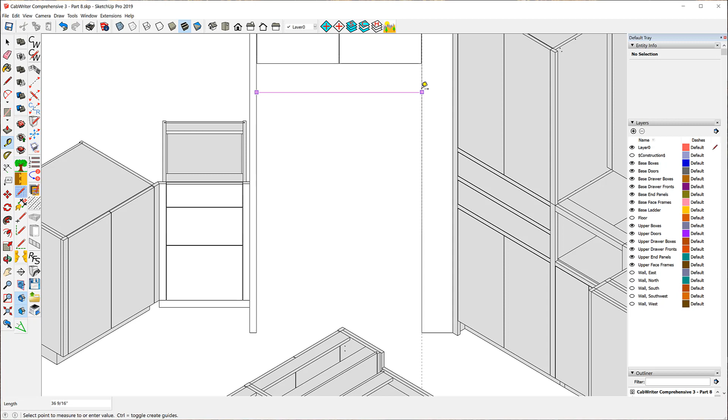One of the errors it had was the width of the opening. The width was, well, let me just check what this final correct version is. Yeah, that's 36 and 9/16. That's the correct number. What I had drawn previously was 35 and a 16th. I don't know where I got that from, but this is the kind of thing that happens when you're drawing. And so I simply redrew the cabinet.

We struggled a lot with this refrigerator cabinet, partly because it's at an angle, and partly because refrigerator cabinets are not common. We don't do a lot of them. And they have this weird starting place up here instead of where cabinets normally start. So I suppose I'll apologize for my mistakes, but I think we learn from those kinds of things.

So what we're going to do today is we're now going to work on the base. And like before, we're going to start here. We're going to work our way all the way around until we get over here. Now, there's going to be a number of changes on the base. And these two cabinets right here are the biggest culprits. This one we have to put some back panels on, if you will, back sheets.

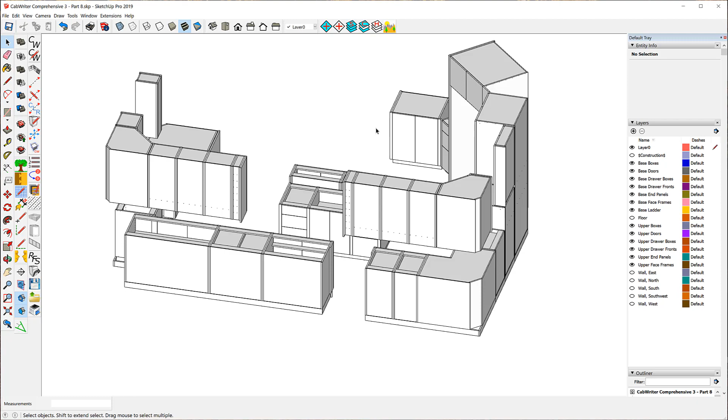And this one's more complicated. We have to cut that to an angle. So it's going to take a while. It may take more than one video. We'll see. But let's get started. This is the finished model. And I want to look at what we have to do over here.

So let me take the custom parts away and get a good look at what we have to do. We're going to put these 3 sheets on the back. And so what we're going to have to do is extend this end out so it lines up with this sheet that's going to go here. But this sheet is going to be 3/4 from the back of the cabinet.

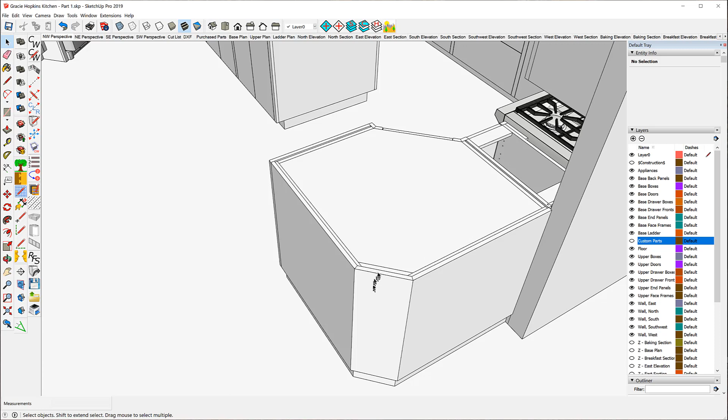Same here. This sheet is going to connect with these 2 sheets with this angle here. So we'll have to create that angle. So let's go back to our current drawing and let's see what we have to do. So here's our current drawing. The first thing I want to do is outline everything we need to do here.

I'm going to start just adding construction lines like this. And now I'm going to bring this construction line out 3/4 of an inch. And I'll bring this one out 3/4 of an inch. And I'll bring this one out also 3/4 of an inch.

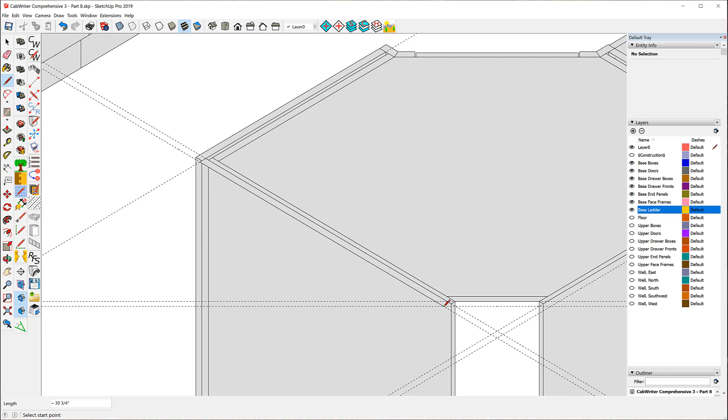And let me add one more here. 0 offset. Now I think I can draw what it is I need. Start there, go there, there, there, and back. Now use the push-pull.

Okay, now let's just make sure we know what this cabinet number is. And it's C4L. Now I'm going to make a CabWriter component of this. Make it C4L. It's going to be part of the sheet panel. End sheet, but I'm going to call it back sheet. I'll give it the same instance name. I'll CabWriter protect it and say OK.

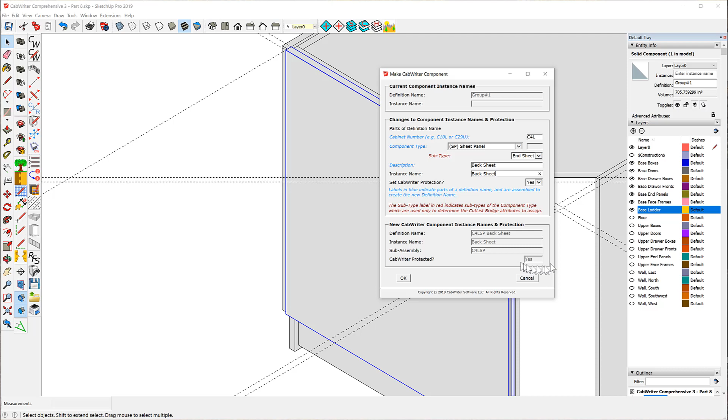Down here is the result of all of that. C4L SP for sheet panel, back sheet. Instance name back sheet. It belongs to subassembly C4L SP and is CabWriter protected. All right. Next thing I want to do is I want to clip this. I want to clip it right there. So I'll unlock it, edit it.

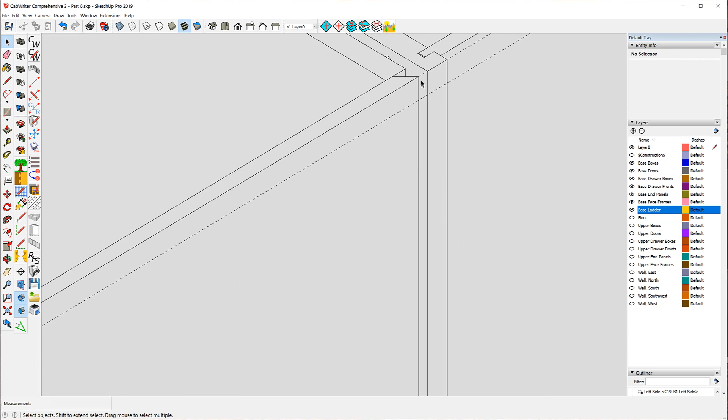Now there's two of them. This and this are the same part. So it's asking me, do I want to unlock both? And I do. So now I'll edit both at the same time. I'll go from here to here. And I'll bring it down to there. Now, this one doesn't appear to be edited, but if I look at the other end, it is. So I have to flip it.

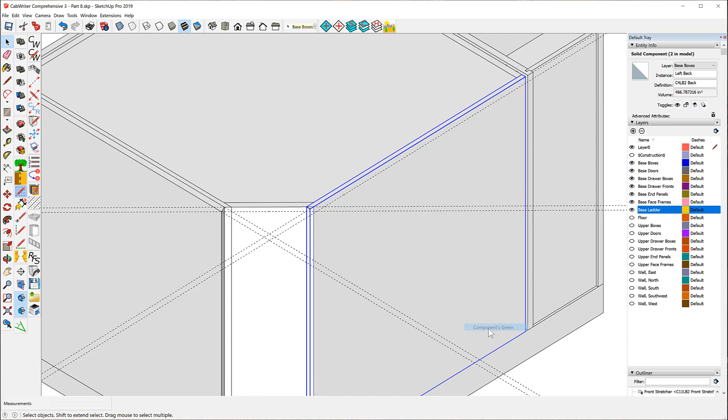And let's try flipping it along the red axis first, see what happens. Well, I got my angle down here that I wanted, but it's not quite right. So let me flip it along green. And that's better. So it's a case where you have to flip along 2 axes.

Sometimes flipping doesn't work and you have to use rotating and things like that. And sometimes a combination of flipping and rotating. But this worked by flipping it both in the red and green axis. Now I can draw this guy. And I'll bring him down with the push-pull tool. Bring him down to here. Make that a component. Again, C4L.

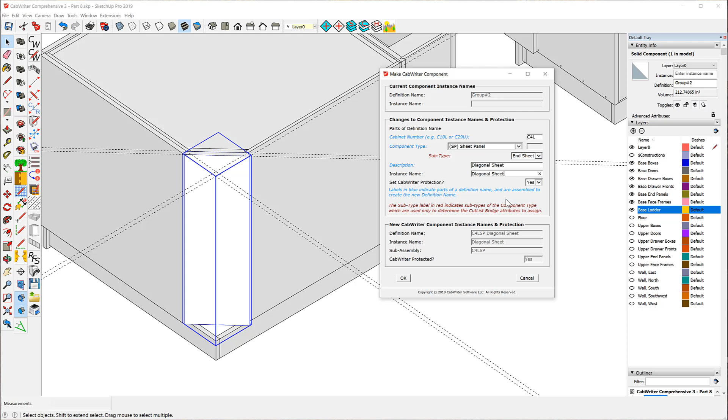And again, it's a sheet panel. End panel. I'm going to call this, I'll call it diagonal sheet. And I'll use the same name for the instance name, CabWriter protected, and say OK.

Now notice that the bounding box is not right. I have to fix that. So I'll right click, change axis, and I'll just go like that. All right, one more piece to draw over here.

Well, I'm going to have to bring the wall in on this one. I have to bring in the east wall. And I think what I'm going to do is go right to that point, out to that point, and back. And I think I've got it.

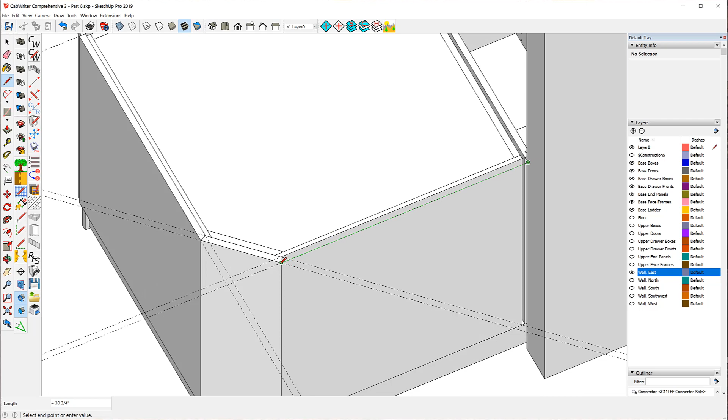And again, I'm going to call this wall sheet. I'll make it a CabWriter component. C4L. It's a sheet panel. End sheet. I'm going to call it wall sheet. Give it the same instance name. And it's CabWriter protected. And I'll say OK.

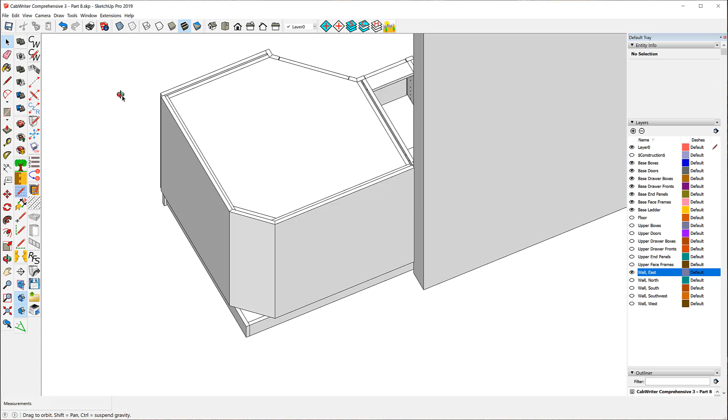All right, now I'm going to get rid of these guides. I don't need them. I have one more thing I have to do up here. I got to bring this out to the end. So I'll just pull it out to there. There we go. We have our backs added.

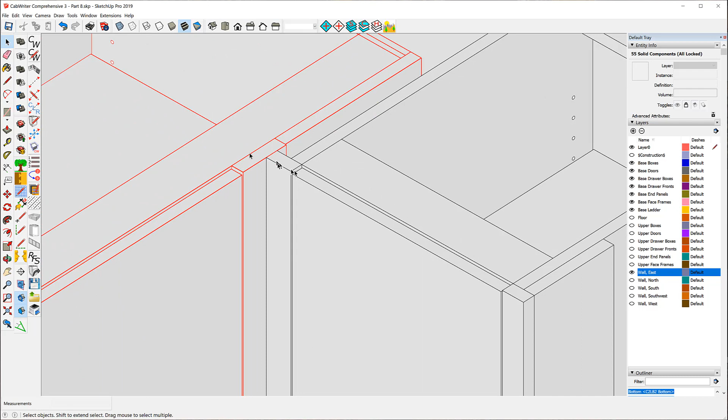So let's go around now and see what else we have to pick up. And just to be sure of what we want, I'm going to use the Select Cabinet tool to let me highlight things. Nothing there. This is fine. This belongs to this cabinet, and this belongs to this cabinet. That's fine. That's an opening. Let's choose this one. Okay, that's fine. Here we have an issue.

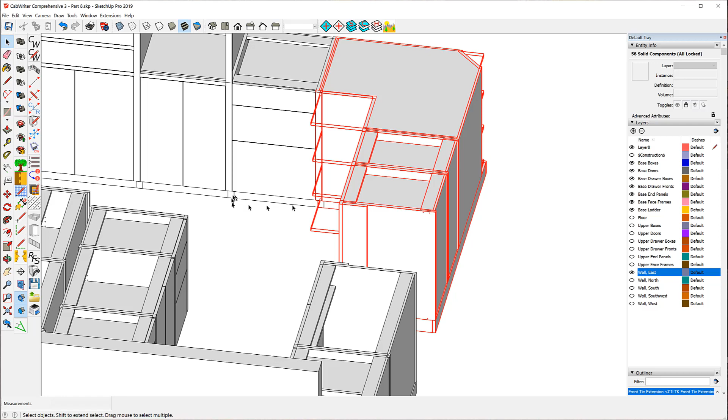And I'm going to give you a tip. You can easily spot, most of the time, stiles that are being shared by looking at the toe kick. And when you see that kind of pattern, and over here too, that's an indication that you're sharing stiles. So what I want to do is choose one of these, and I really don't care which one. Just delete it, because I still have one left.

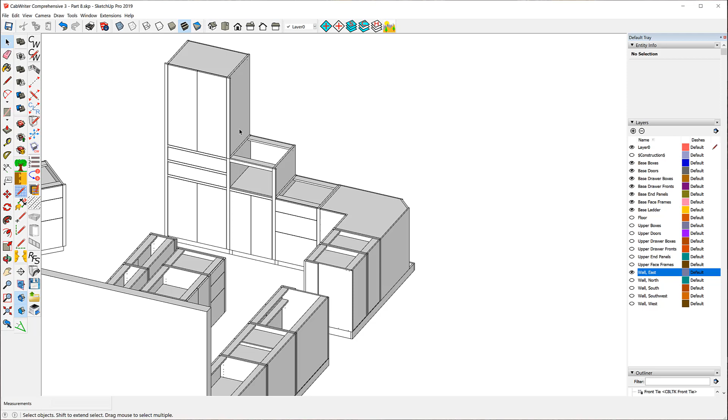Now in this case, I have to choose the upper stile. So I'll reselect and choose that one, unlock it, delete it. I've got an issue here. I'm missing a sheet here. I'll fix that in a moment. Again, here I have to keep this stile, and this one I want to unlock and delete it.

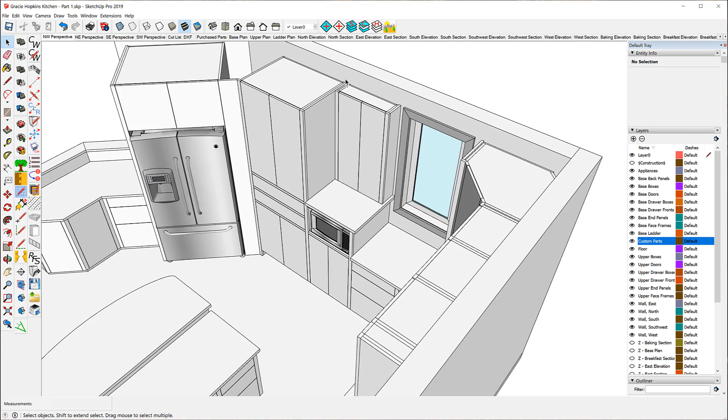All right, let's go and look at what we have to do here to fix this. If we look in the original drawing, the problem that I noticed a moment ago is that there's no end sheet here. This end sheet right here, the other drawing did not have an end sheet. And I suspect that this cabinet, instead of being up against an end sheet, is actually up against this side instead of the end sheet.

So I think we're going to have to create an end sheet here, and I think the way we do that is we have to change this stile from what it is now, which is a connector stile, to a right end sheet. Move this cabinet to the right. And the other problem I saw is we have to create an end sheet here, going back all the way up against the wall. So we'll go back and make those changes.

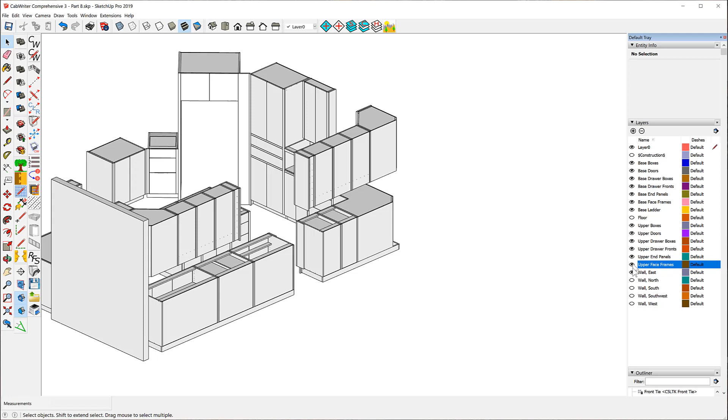Now to test out my theory, I just want to bring in the upper boxes. And as I thought, this cabinet is up against this side, and there should be a sheet here. So we're going to move this cabinet to the right. And I'm going to move it 3/4 of an inch. So an easy way to do that is use the move tool.

It says it starts here, and goes here. Well, 3/4 of an inch is half of this stile. So if I go to the center, the midpoint here on this stile, click, then I can go out here any place, the midpoint of this one perhaps, and I've just moved my cabinet to the right 3/4 of an inch.

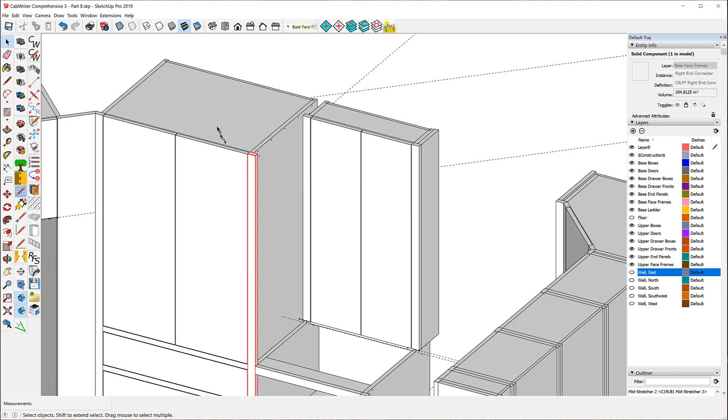Now notice this stile, look up here in the entity info, is a right end connector. I want it to be a right end sheet. So I can redraw this cabinet. Actually, I don't want to redraw it. I want to edit the story stick. The left connector I'm going to leave alone. The next one, instead of a right connector, I want it to be a right sheet. So I'll say OK. Be patient.

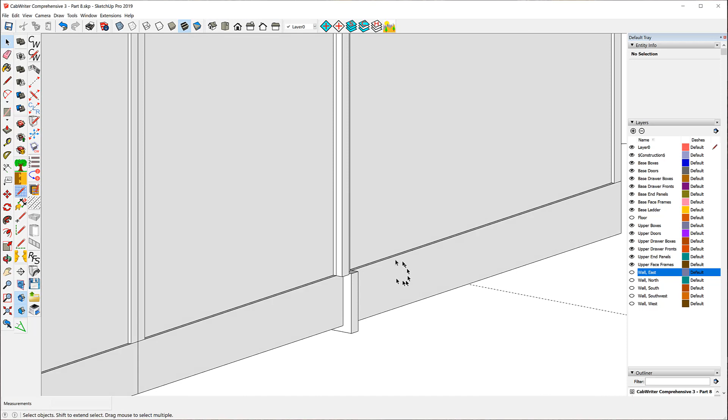Really patient. And now I have the right sheet. Now the only problem with that right sheet is it goes down over top of the side of this cabinet. So I need to edit that. Make sure I get the right one. That's a right end sheet right there.

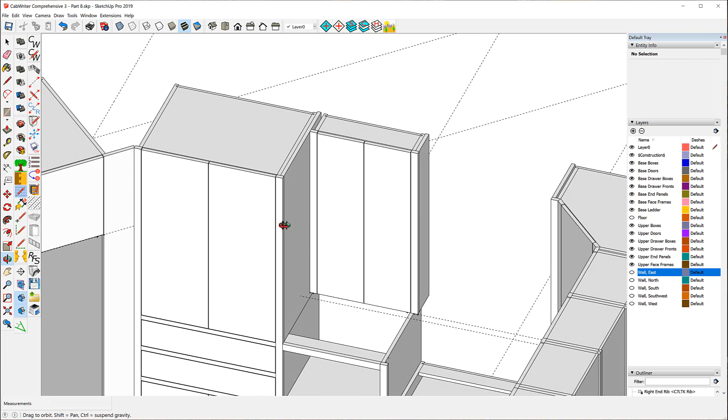So I want to unlock it, edit it, and with the push-pull tool, I'm going to bring it up. And the question is, where do I want to bring it up to? I want to bring it right to there. So that should be correct now. And we now have this cabinet up against a sheet. All right.

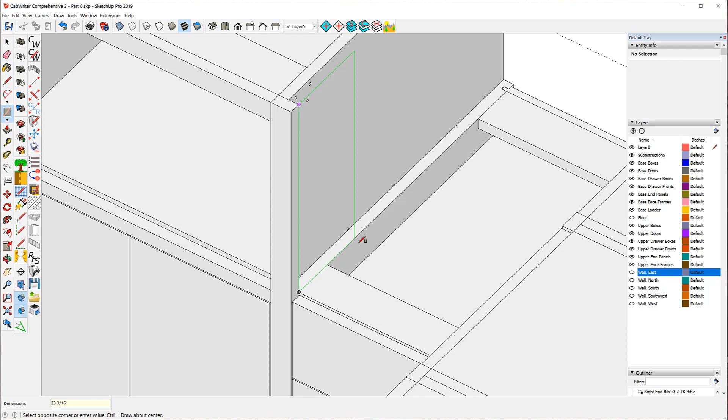Now I need to put an end sheet on this. I think the easiest way to do that is to just, I'll use the rotate rectangle tool. Come along that. And I think this wants to be 23 3/16. I think that will, yep. And I want to push-pull it to there. So that'll be 3/4 of an inch. So let's go around front.

And we're going to make it a component and add it to this cabinet, which is C7L. Oh, that reminds me. I've got to change this one back to C8L. And this one, we're going to make that a component. C7L. And it's a sheet panel, an end sheet, and I'm going to call it right end sheet.

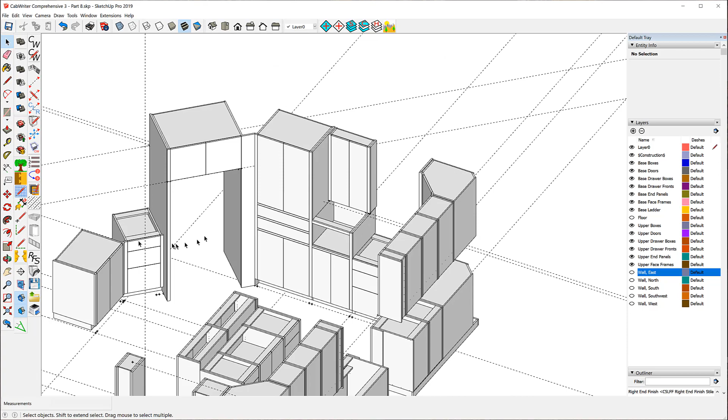Check to make sure that that says yes, so we've got it protected. And by the way, since we modified this, we should protect it too. So I'll right click and say, CabWriter, set protection. All right, now the only thing we have left, I believe, we did this in a previous part. So I think what we have to do now is put the 45-degree angle on this two-door standard base.

So let's just look at the completed drawing and see what we have to do. Let's take the custom parts layer out of here so we can see what we have to do over here. The most important dimension here, I think, is this one right here. That's 12 inches. It's 12 inches to the point where the end of the cabinet turns at a 45-degree angle to here. And you notice that there's a stile here.

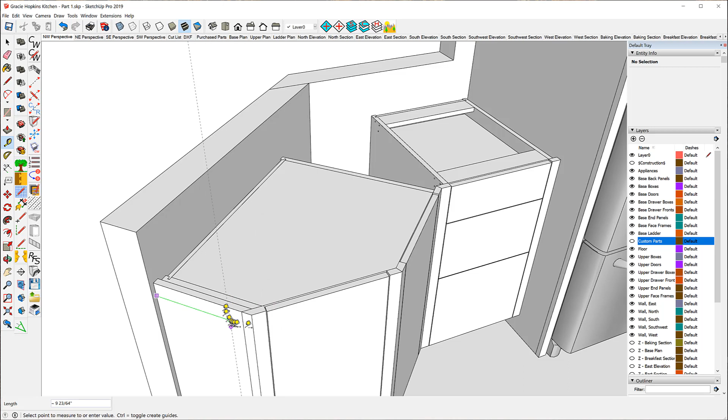And one of the things I need to do is make sure that at this point, this 45-degree line to here will represent the front of this face frame, albeit only stiles. And those will be 13/16 wide. This is 3/4 of an inch wide. I don't know why I'm getting the approximate sign there. There it is. 3/4 of an inch wide, and this is 13/16. So let me outline that.

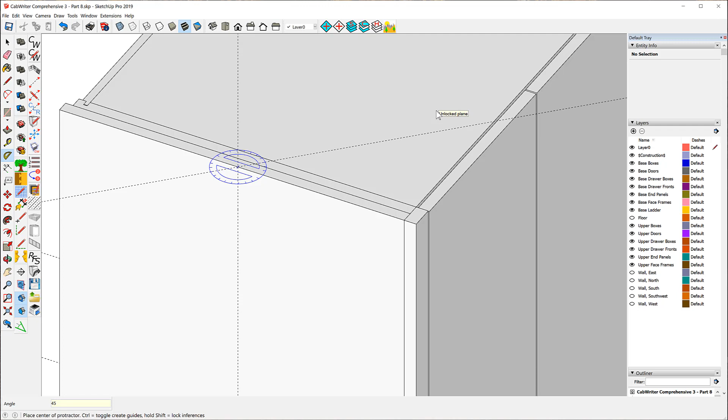Also, these are 1.5 inches. The face of these are 1.5 inches. Here, here, and here. Those all three are 1.5 inches on the face. So with that information, let's go back and see what we can do. All right, so let's mark off 12 inches. And from that, let's mark off 45 degrees. Now that's going to be the front of the face frame.

So the other thing, the face frame is 13/16 inch thick, so I'll mark that off. And right here along this line is where I'm going to cut the top and bottom at a 45-degree angle. So let me do that right away. And I want to view, well, before I do that, let me mark this. All right, now I'll look at it.

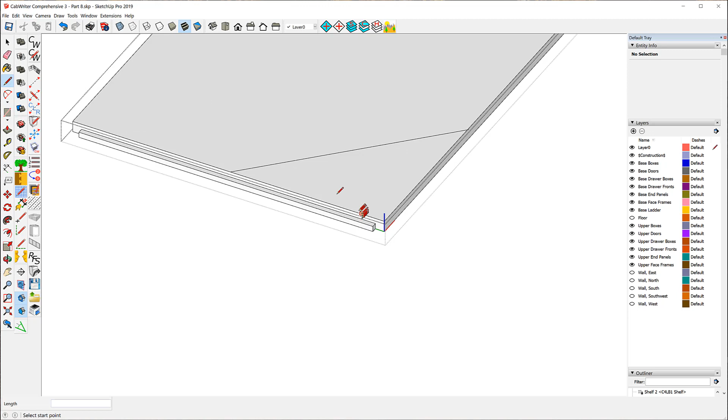I'll hide rest of model. And now I have to be very careful here. I'll mark this to get rid of this tongue. And now I can get rid of the rest of that. And I can erase this. Now I'm going to have to come back later and take a little off this, but I won't worry about that right at the moment. Oh, let me get rid of the construction line.

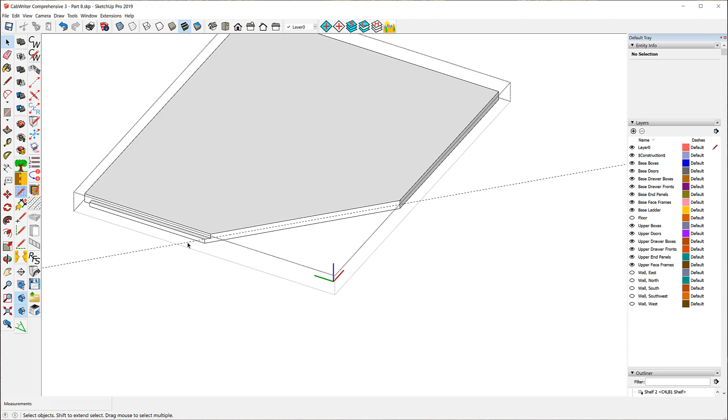Okay, now I have to do the same thing to the bottom. So let's just clear all the layers, and let's just bring back the base boxes. So now I can get at the bottom. And I'm going to bring this same line down along the blue. I'll lock in the blue with the up arrow to this bottom surface. And let me edit that. I'm going to put a mark right there. Hopefully I'll be able to see that.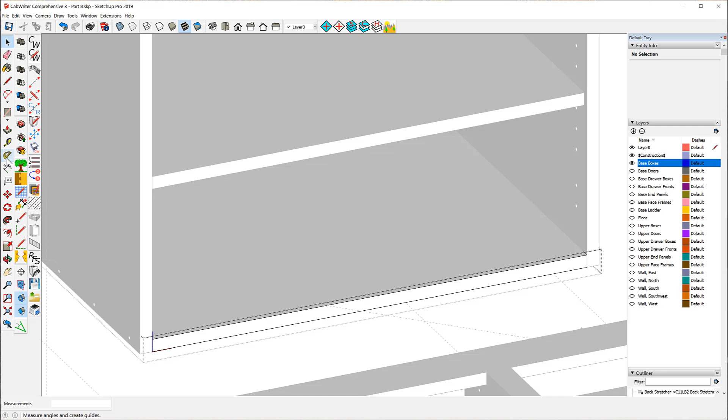Let me unlock it, edit it, and bring in the rest of the model just for the moment. Oh, come on. And what I want is put a 45-degree line right there. All right, now I can hide the rest of the model.

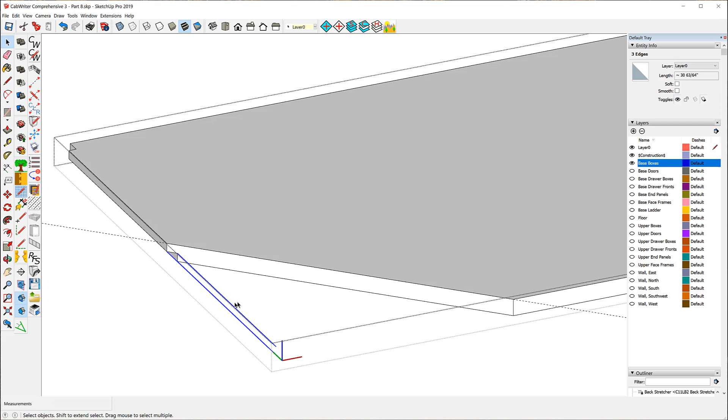And I think I have it. Okay. Let me get rid of the... Whenever you have these construction lines within an edit component mode, you got to get rid of them before you leave edit component mode. It's something I often forget to do, but it's really helpful to do it. And I can get rid of this one now. And I can get rid of this construction point.

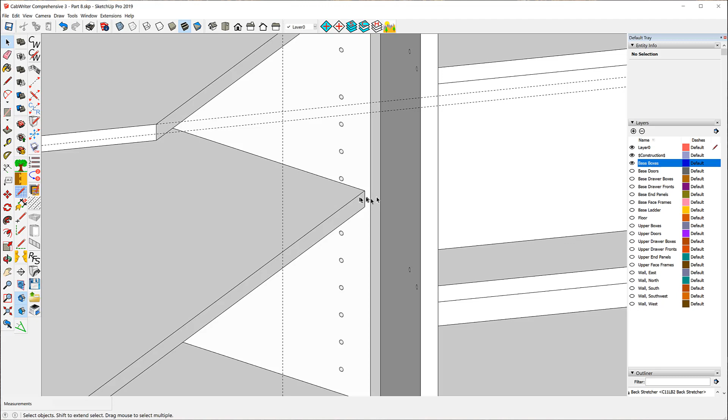Okay. Now, I can do the same thing to the shelves, but the difference is that if I bring this line down to the shelves, since the shelves are set back, and they're set back 1/4 of an inch from the sides, and the way that's done is, by the way, the clearance. When you specify a clearance for a shelf, we typically specify 1/8 of an inch. However, because the shelf has to be up against the back, it ends up being set in here 1/4 of an inch. So we need to do that. We need to bring this line down, but then we need to move it back 1/4 of an inch. So let's do that.

Bring it down along the blue to there. And we need to bring it back 1/4 of an inch. So I want to make sure I'm on this surface, so I'll hold this along that edge and I'll type 1/4 of an inch. And now I can get rid of the one in front. Edit this. And I want to unlock both shelves so I can edit both of them at the same time. And I'll view rest of model so I can see that line I put there.

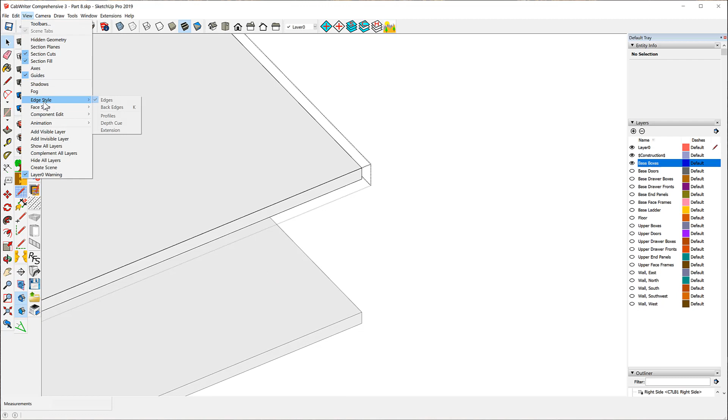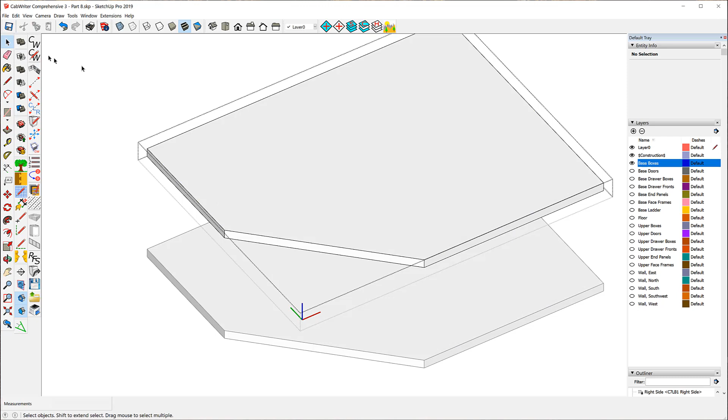And now I can hide rest of model. Oh, wait. No, I can't. So what I'll do, I'll go from here out to on that line. Now I'll have a line sticking out here, but that's okay. Now I can hide the rest of the model. And hopefully that's an end point right there. Now I can erase that. And I think I have that done. So I can erase now. Oh, I may need this up here, but I can get rid of this one.

All right, now the toughest thing we're going to have to do here is we need to move these holes, keep them intact and not lose anything. We need to move it back here. So what I want to do is I want to edit this. And view rest of model. And I'm going to put two construction points, one there and one there, to let me know where I have to come back. And what I'm going to try and do is take this part of this front and move it back to this point right there. So I'm going to hide rest of model right now.

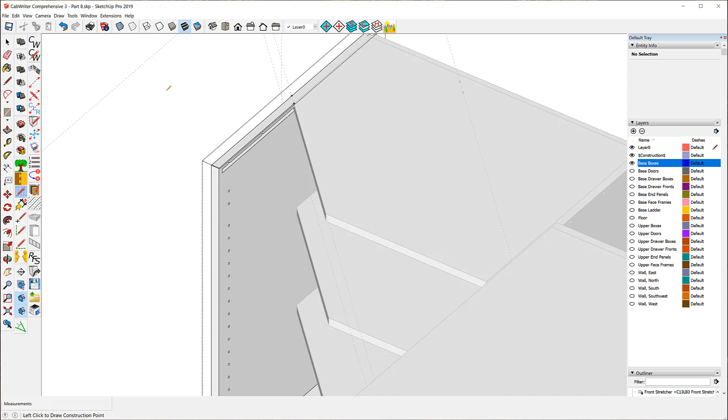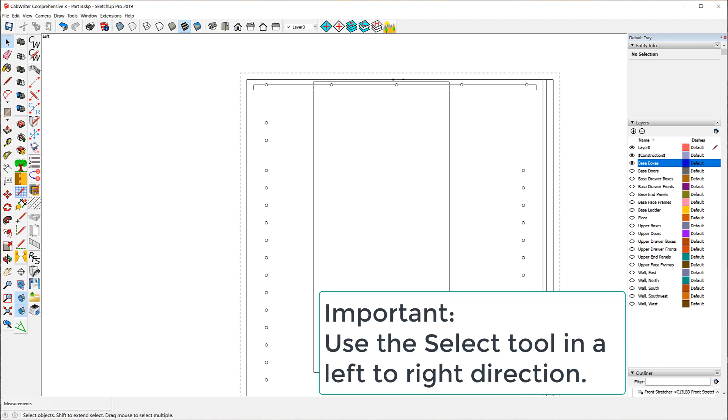This is going to be the trickiest part of this whole thing. You want to pay close attention to what I'm about to do here. Let's see if I can look at this... wrong side. That's better. Let's see what happens if I use the select tool in a left to right way. Let's see what I've selected here. Okay, let me delete that. Notice I used it in a left to right fashion to get these two holes. I'm going to delete those.

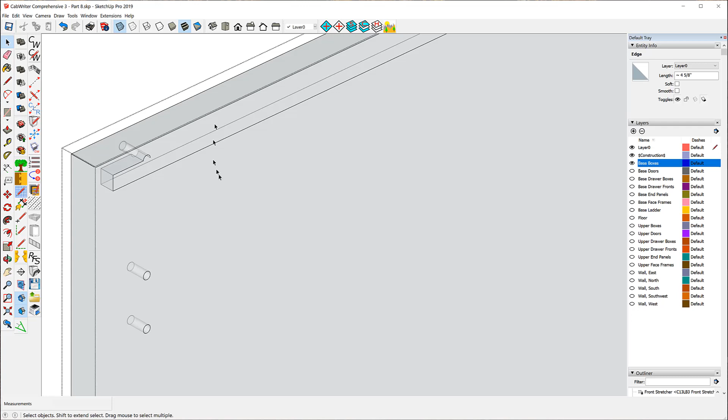Now what I want to make sure of is that I didn't delete the front or back surface. So far, so good. Now this is really tricky, and what you're going to find is that undo is your friend. If you should lose a surface, you definitely want to do an undo. The other thing I'm going to delete, and I'm going to look at this with X-ray, is I'll delete that line, that line, that line, and that line. Now I'm going to do the same thing to the bottom.

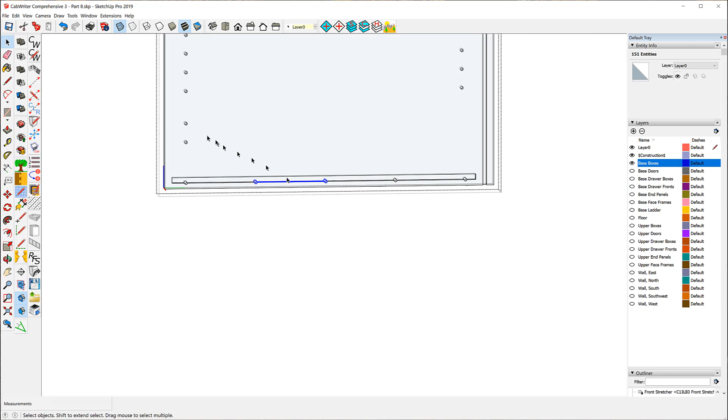So let me do the same thing to the bottom. Oops, wrong side. So I'm going to go left to right. Delete those. Now let me look, see if I selected what I thought I'm selecting. And it looks like I did. I'm going to delete that. And like I did before, I'll delete this line.

This line. This line. And this line. And again, I want to make sure that I've not lost either this surface or this one out here. So far, so good. Now it's repair time. No, now it's move time.

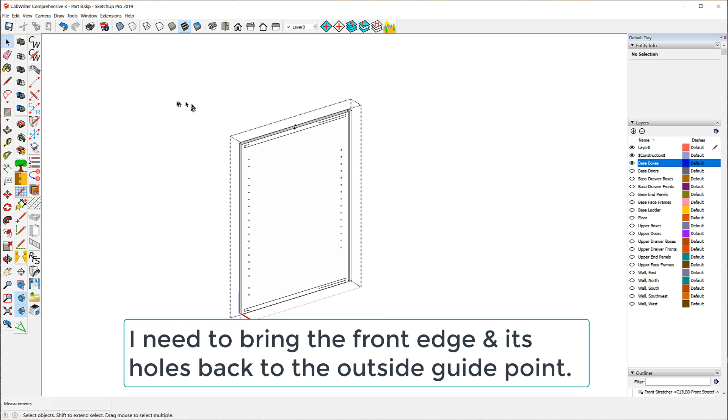So again, I'm going to choose left to right. And I'm going to do it so that I get all of this information here and the end. I don't know if I got this. I did. Okay. And I'm going to move it with the move tool. I'm going to move it to that point right there.

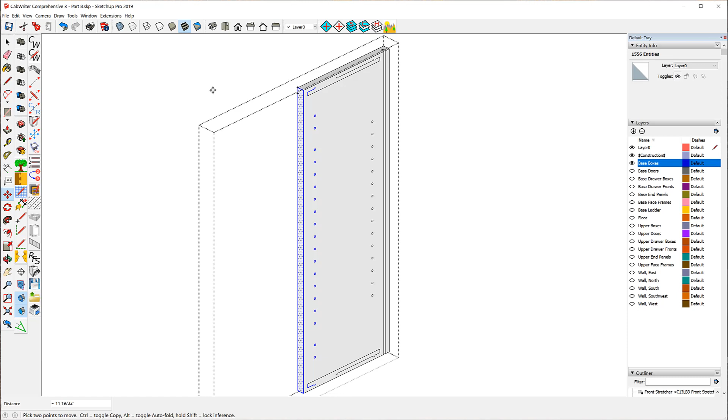And again, I want to go around, make sure I still have the other surface. I do. Everything looks okay. Now it's repair time. So I'll look at this way. And I want to connect that endpoint right there to that endpoint. And I should zoom in here really close. Make sure I'm getting the right endpoints. To that one.

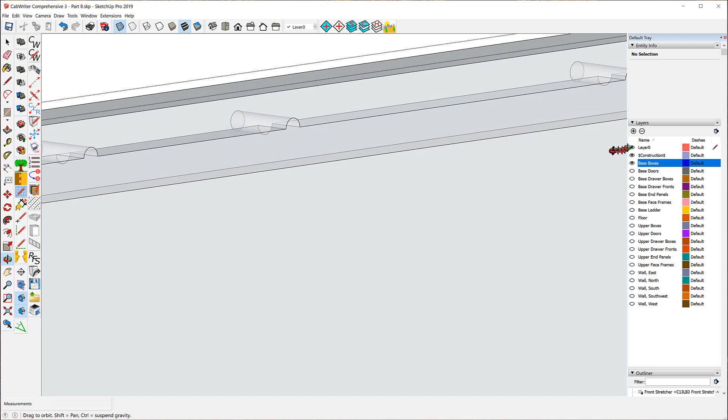I think I've got it. So let me leave X-ray, delete this, and take a look at this. Oh, I'm missing.

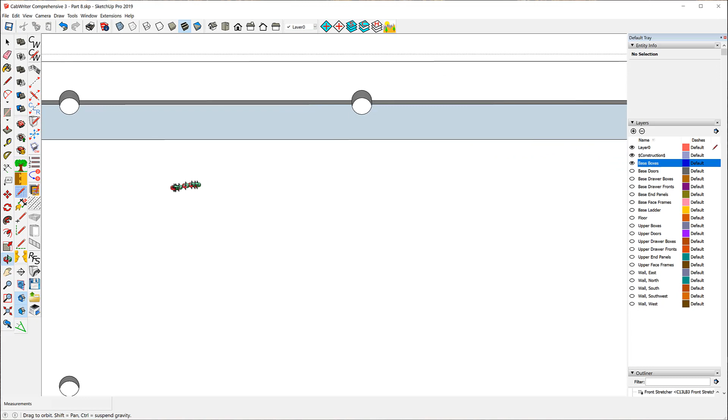I'm missing something. Something here. Let me delete that. Not sure how I did that, but now I've got it. I need to inspect these very carefully. And I think this is the wrong color here, so I'm just going to reverse faces. And let's edit that again.

I think I have it. I haven't lost anything over here. Let's go to the bottom.

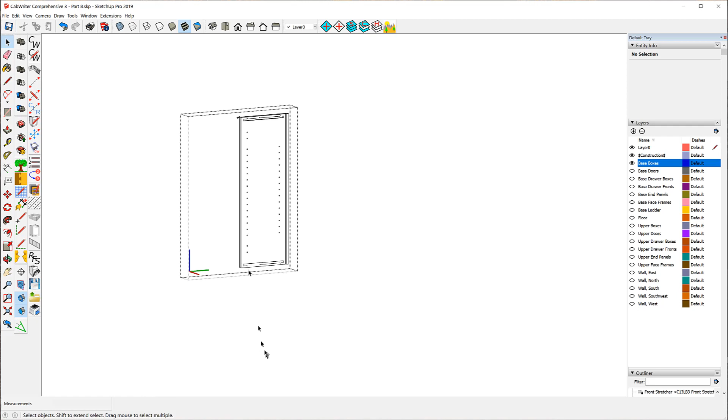Well, I think I know how I created that problem before. I think I probably went from here to here instead of from here to here. That's what I'm guessing. But let me go in here and make sure I get the right point. Go from here. Here. Get rid of that. And let's inspect things very carefully.

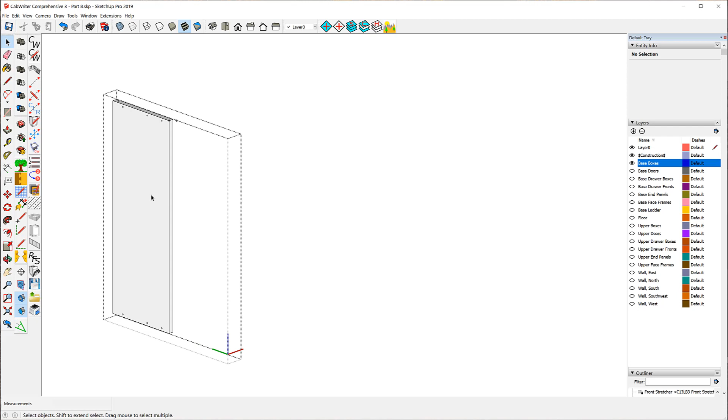Okay, I think I've got everything. Let's go around this side and look. Now what I have to do is bring this line out to that point right there. I'll get rid of my guide lines.

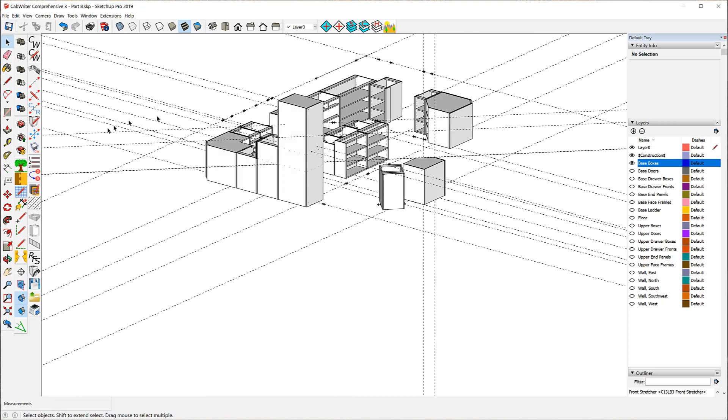And the other thing I'm going to have to do, of course, is bring the bounding box back, or the axis. The bounding box is fine. But let me change axes. And I'm going to use X-ray tool to do this. I'm going to go from here to here to here. And there we go. All right, I think we successfully did that.

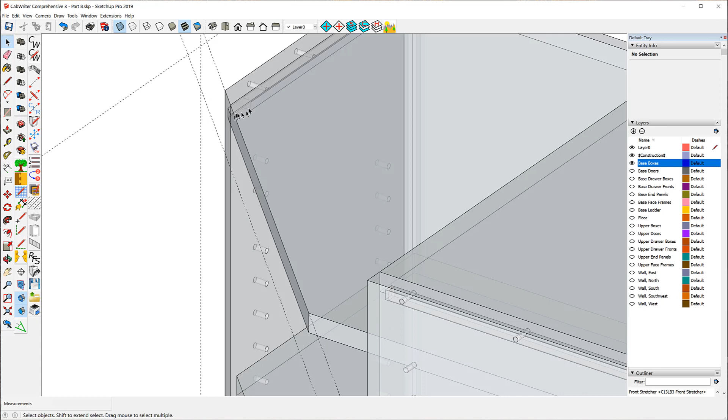But here's something we need to fix. Notice I have a tongue here, but that tongue has to come back to here. And not only does it have to come back to here, but if I select this top, notice that it stops an 1/8 of an inch from the end. So what I have to do, I'm going to edit this. I'm going to edit the top.

I'm going to hide the rest of the model. And I'm going to create a line, 1/8 of an inch back from here. I hope I'm doing this right. And now I'm going to hide rest of model.

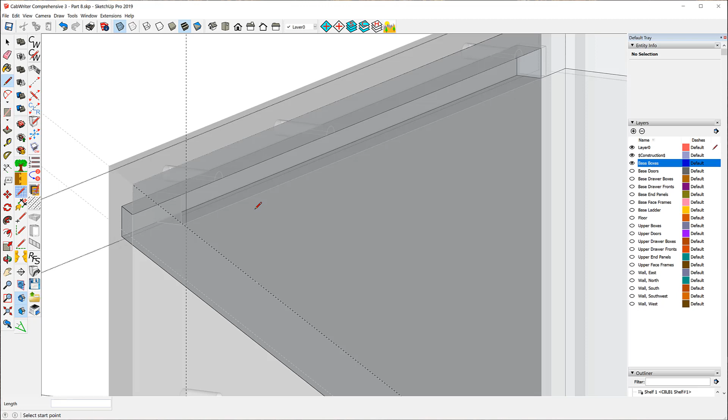And I'll bring a line out. Along the red to there. Along the blue to there. And I've got to bring it up to there. So let's see what I've got now.

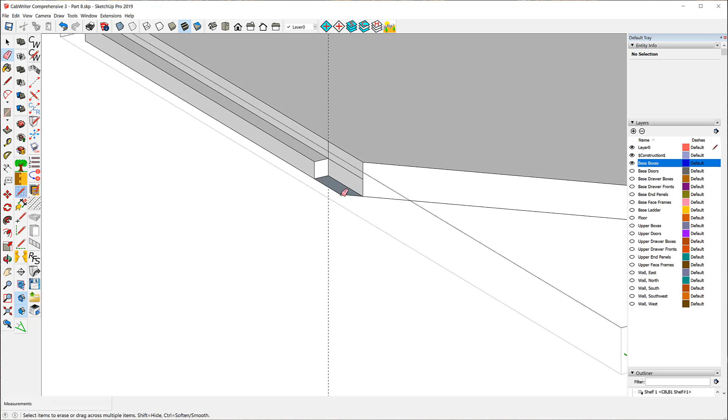All right, I think I've got it. I can erase this line too. And that's it. Now I'm going to do the bottom offline so I don't take so much time here online. I'll do the bottom offline, then I'll come back and we will put the doors on.

Okay, I'm back and I fixed up the bottom. So now let's bring in the rest of the base. Now the other thing we have to fix up is this side. Remember that this point here, 12 inches, was the corner of the stile. So what we have to do is edit the side here.

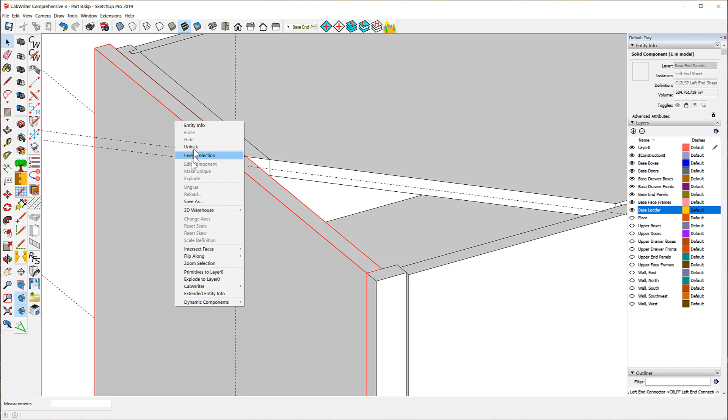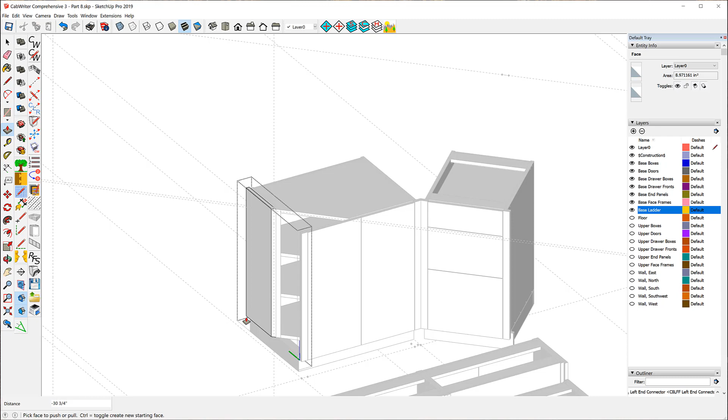And we'll view the rest of model. And I just want to check and make sure that's 45. And indeed it is. So I should be able to bring this down. I'm going to have to fix up the axes.

Okay. So we got that done and that done. Now I think we can draw in the stile. Come over here 1.5 inches. And come back 13/16.

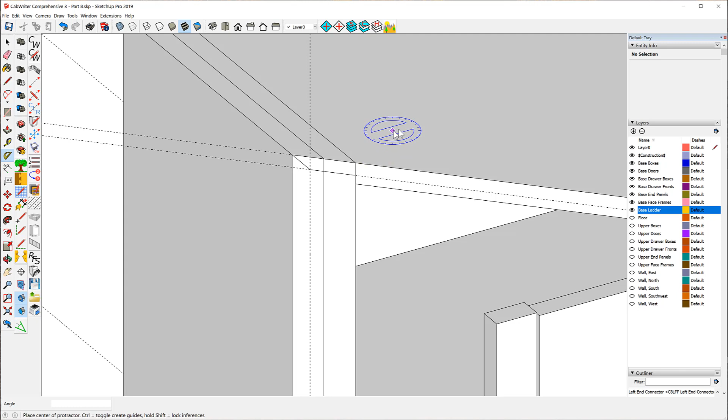I guess maybe I need to have a construction line. I'll lock in with the Shift key. Go to that endpoint. That's not going to let me do that. Well, I'll do it this way.

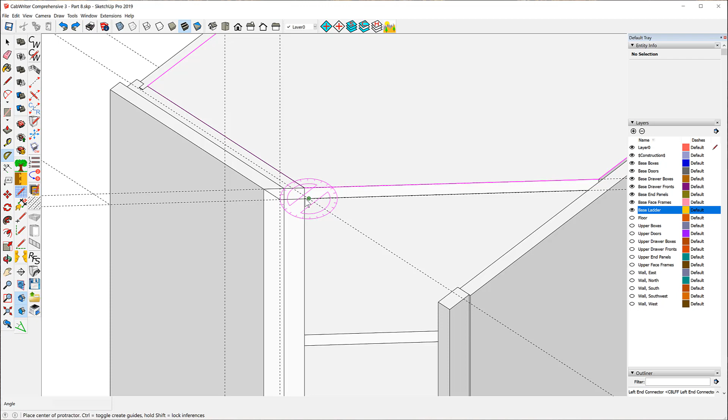No, that's not what I want. This is what I want. 90. Let me just check that this is 1.5 inches. And it is. I'll bring this down. Okay. One more check. 13/16.

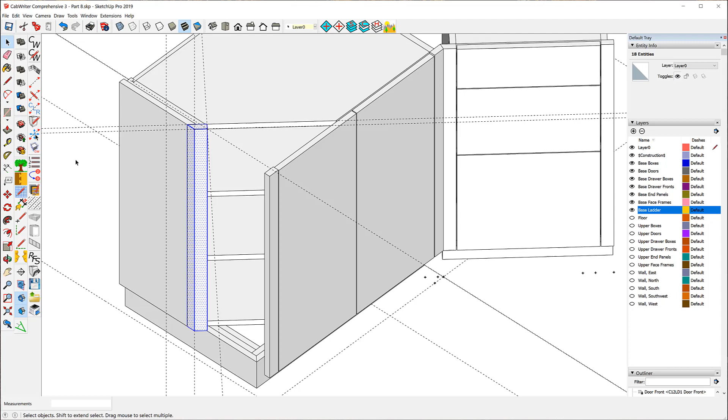All right, now I'm going to make this a component, and I'm going to attach it to this cabinet, which is C12L. And I'm going to call it a left end sheet. It's part of the face frame. It's a stile. It's a sheet stile. I'm going to call it left end sheet. And I'll give it the same instance name.

And let's see, C12L face frame left end sheet, and it's C12LFF subassembly, and it's protected. All right. Now I can get rid of these.

Now, these two doors, by the way, notice that there's two of them in the model. This and this are the same door. I'm going to bring this one out. I'm also going to make it unique. I'm going to move it out here and save it for a second. Bring it out 60 inches and save it. This I'm going to delete altogether.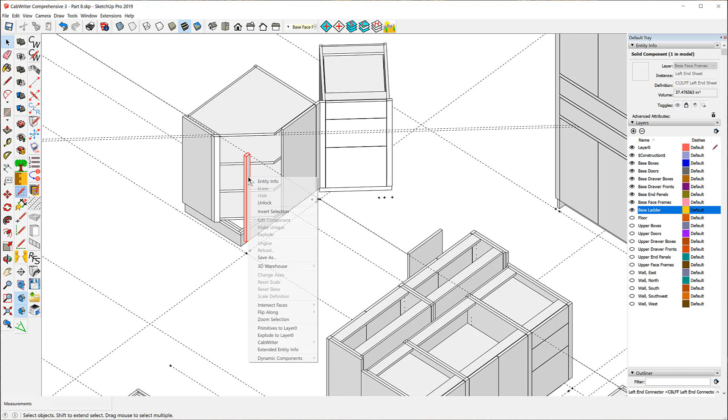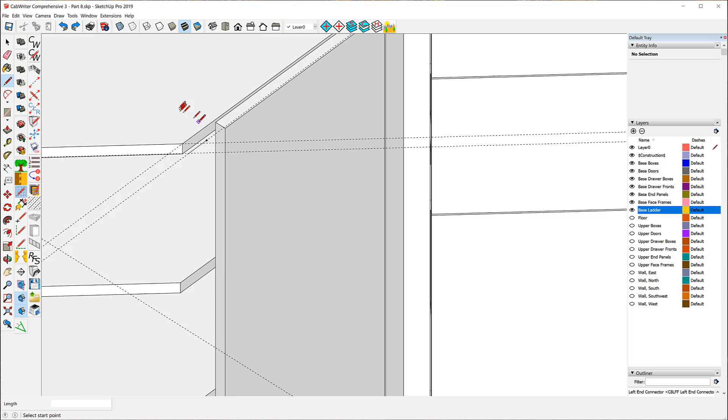And I'm going to put another construction line here and then bring it out. I'm going to bring it out 13/16. And what I'm going to do is I'm going to create a style here that's got a face that's 1.5 inches. So let's see if I can draw that. Whoops, that last one wasn't right. Let me zoom in here. I think I got that right. Looks right.

I'm going to bring that down here. I'm going to make a CabWriter component out of it, C12LFF. It's part of the face frame. It's a style, but it's a connector style. And I'm going to call it center connector. And I'll give it the same instance name. And it's protected.

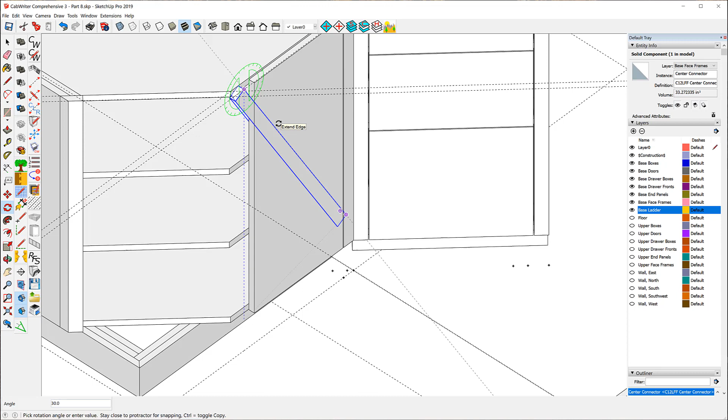Now what I'm going to do is I'm going to rotate it 180 degrees with the rotate copy. So I have to push the control key and make sure I type in 180. Now I'll use the move tool. Pick it up at this point. Bring it to this point. And now I'll use the rotate tool. Whoops, wrong one. Well, let me just choose it to make sure I get the right one. There we go. So we have those two.

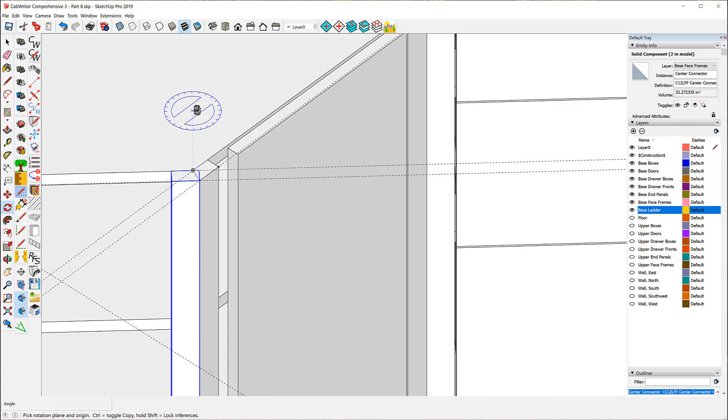Now I believe I can get rid of this. I believe I can get rid of this. Not sure what that is, but I'll get rid of it. And I'll get rid of this construction point. Well, that may be part. Nope, it's not. There we go.

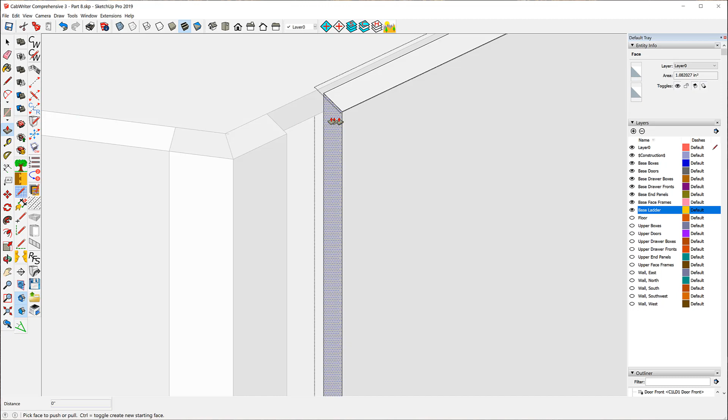All right, now this one, I have to edit this, unlock it. And I'm going to bring it all the way out to this point here. Now that's going to leave me no gap, but that's okay. Because now I can go to View, Hide Rest of Model, and I'll bring it back the dimension of the gap, which is 3/32. And there we are. All right, so that one's in place.

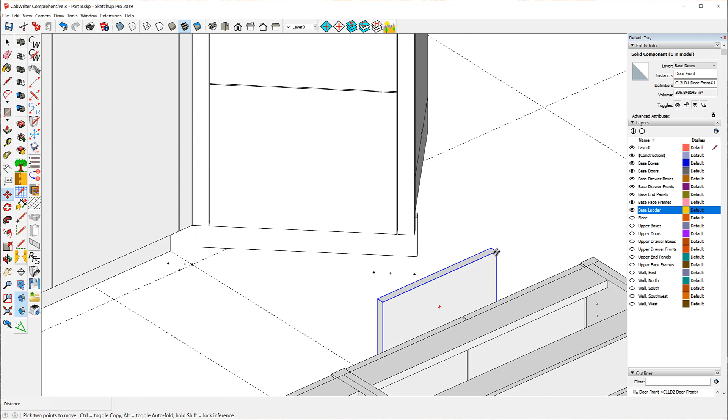I'm going to put this one in place. I'll pick it up. I'll attach it to that point right there. I'll use the rotate tool. Now I have to do two things, or three things actually. I got to move this down 3/32. I got to move it this way 3/32, and I have to make it wider. So let me use the move tool. Come down along the blue axis 3/32. I'll use it again and come along that axis 3/32.

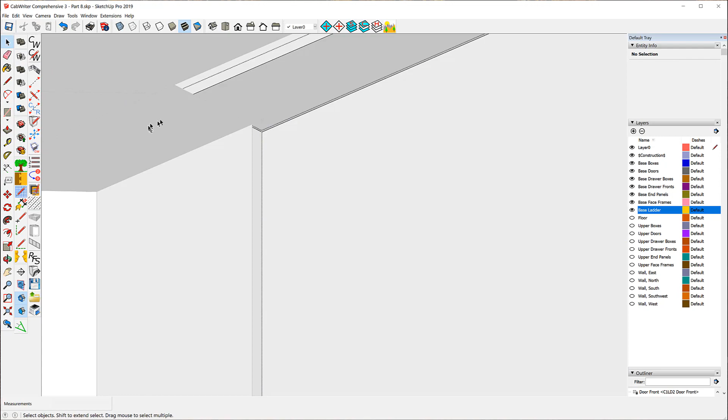And lastly, I'll do the same thing I did with the other one. What I can do, maybe, to make it a little quicker, is come out here 3/32. Leave myself a construction point. Edit this. View rest of model. And bring it out to the construction point. And if I did that correctly, that should be a gap of 3/32. And it is. So now I can get rid of my construction point. And probably get rid of this one too.

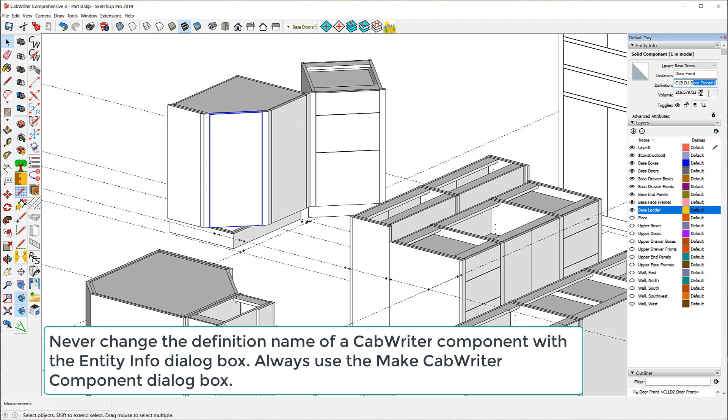All right. Now this door is called door front number 1. What I want to make that is, I don't know, perhaps left door. But I can't do it with that tool. If I rename this part with the Entity Info tool, I'll lose all of the attributes in it. So I have to do it with this. And so I'll just call it left door. And by the way, it's a panel, and I want to copy this and make the instance name the same.

By the way, it's very important that I get the right subtype in here, because it's the subtype that stores the attributes for oversizing and things like that. So if I don't get this right, I don't get the right attributes for the part, the Extended Entity Info attributes. So I'll say OK. And I'll do the same to this one. I'll make this the panel. And I'll make this right door. I'll give it the same instance name. All right, we've done it.